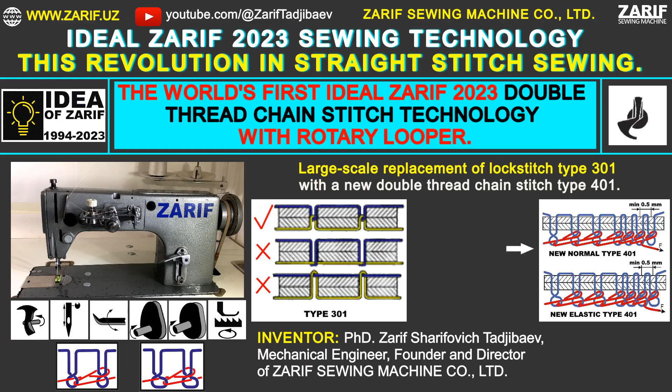Fundraising campaign to bring to market the Ideal Zarif 2023 year sewing technology, a revolution in straight stitch sewing. In 1994, we revolutionized sewing technology with the creation of the Zarif double thread chain stitch technology using a rotary looper. This breakthrough was officially recognized in 2000 with US patent number 6095069. It has taken us almost 26 years to perfect this innovative technology, making it the world's first ideal solution for sewing straight stitches. To achieve this, we first developed a prototype Zarif sewing machine based on our new technology in 1997.

We modified an industrial lockstitch sewing machine, Class 1022, Orsha, Belarus, to carry out our initial trials. Through extensive testing, we identified areas for improvement and gradually improved the machine by applying our expertise. Finally, in 2023, we successfully created the world's first Ideal Zarif technology for straight stitch sewing.

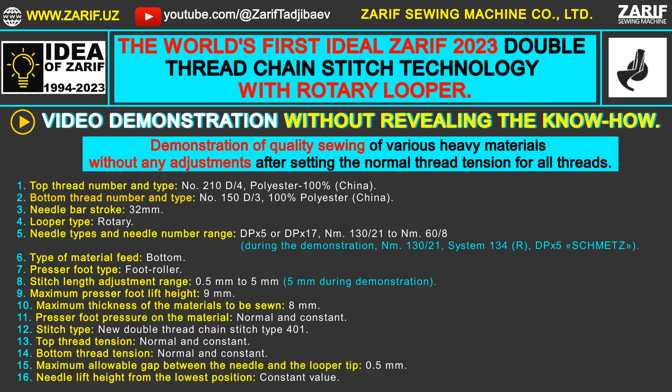Video demonstration without revealing the know-how. Demonstration of quality sewing of various heavy materials, without any adjustments after setting the normal thread tension for all threads. Our prototype of the innovative Zarif double thread chain stitch sewing machine works on the basis of our Ideal Zarif 2023 year double thread chain stitch technology with a rotary looper.

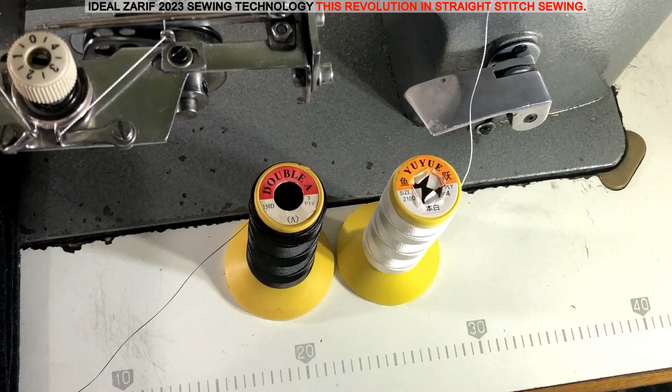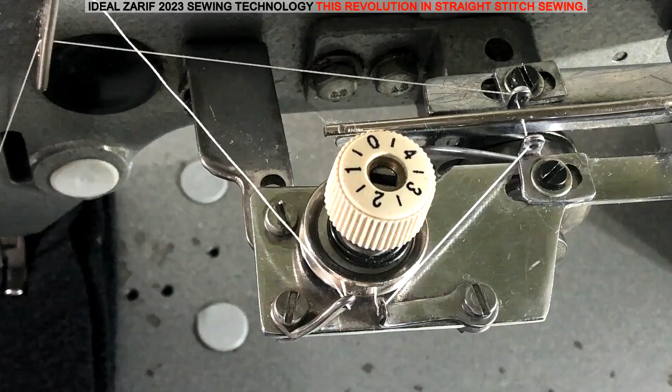For the sewing demonstration, we will be using sewing threads made in China. The main requirement is the absence of knots, as knots disrupt the stitch formation process as they cannot pass through the eye of the needle. During sewing, the top thread tensioner nut and the bottom thread tensioner nut, not shown, remain in a fixed position, ensuring the normal thread tension, neither too loose nor too tight.

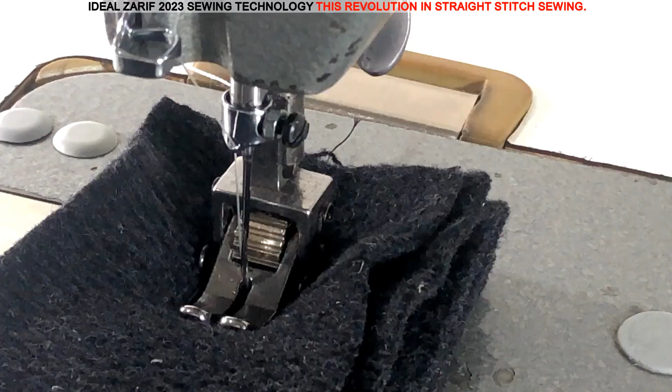In our Ideal Zarif 2023 year double thread chain stitch technology, the needle is not involved in pre-tightening the top thread loop from the previous stitch. As a result, for the first time ever, a double thread chain stitch sewing machine uses a needle with one long groove. This design offers greater resistance to bending compared to the double groove needle used in existing double thread and multi-thread chain stitch technologies.

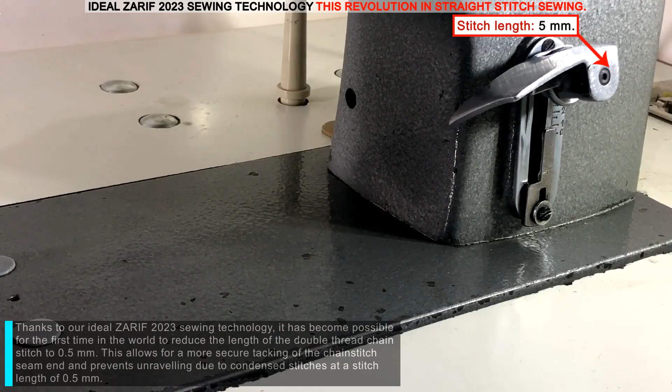Thanks to our Ideal Zarif 2023 year sewing technology, it has become possible for the first time in the world to reduce the length of the double thread chain stitch to 0.5 mm. This allows for a more secure tacking of the chain stitch seam end and prevents unraveling due to condensed stitches at a stitch length of 0.5 mm.

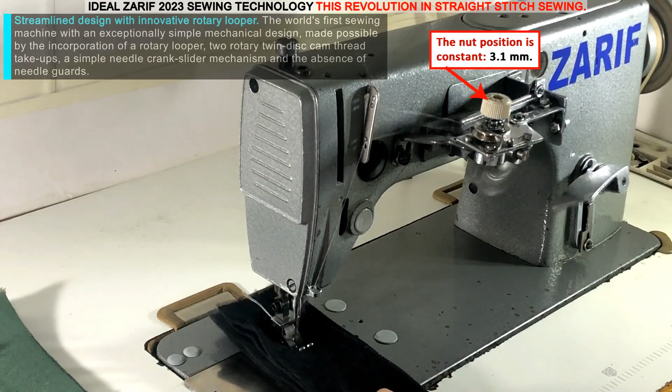Streamlined design with innovative rotary looper. The world's first sewing machine with an exceptionally simple mechanical design, made possible by the incorporation of a rotary looper, 2 rotary twin-disc cam thread take-ups, a simple needle crank slider mechanism and the absence of needle guards.

Revolutionary chain stitch look. This pioneering double-thread chain stitch sewing machine produces a new double-thread chain stitch type 401, in which the loops of the top and bottom threads are rotated 180 degrees. This innovative design makes the underside of the chain stitch look like a thick thread running along the seam, rather than a chain of threads, due to the use of a rotary looper.

Advanced capabilities for sewing thick materials. This groundbreaking sewing machine can sew materials up to 8 mm thick with a short needle bar stroke of 32 mm, thanks to our know-how.

Reliable stitching without needle guards. The world's first sewing machine that provides high reliability of stitch formation without needle guards, streamlining the machine's design and extending the life of the needle, thanks to our know-how.

Easily sew combinations of different materials. The world's first double-thread chain stitch sewing machine that can sew combinations of different materials such as textile leather, textile plastic, and textile plastic zippers without changing the normal tension of the threads, thanks to our know-how.

Secure tacking of the chain stitch seam end. The world's first double-thread chain stitch sewing machine, thanks to our know-how, makes it possible to reduce the length of the chain stitch to 0.5 mm, thus making the end of the chain stitch seam more secure against unraveling by condensing the stitches with a stitch length of 0.5 mm.

Our innovative prototype Zarif sewing machine has made it possible for the first time to sew materials up to 8 mm thick with a short needle bar stroke of 32 mm, thanks to the use of our know-how, making the machine universal for a wide range of materials. The thickness of various cross-linked materials consisting of two or more layers in a compressed state.

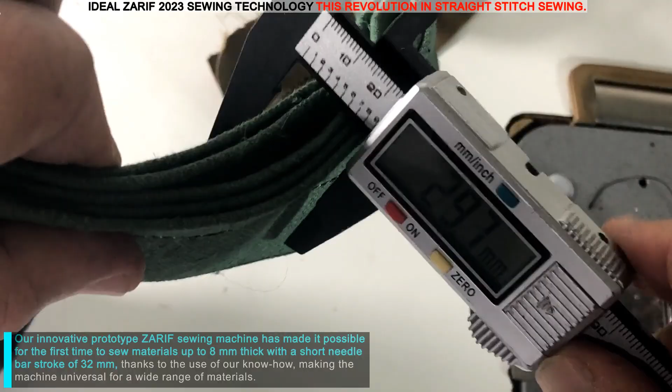Our innovative prototype Zarif sewing machine has made it possible for the first time to sew materials up to 8 mm thick with a short needle bar stroke of 32 mm, thanks to the use of our know-how, making the machine universal for a wide range of materials. The thickness of various cross-linked materials consisting of two or more layers in a compressed state. Our innovative prototype Zarif sewing machine has made it possible for the first time to sew materials up to 8 mm thick with a short needle bar stroke of 32 mm, thanks to the use of our know-how, making the machine universal for a wide range of materials. The thickness of various cross-linked materials consisting of 2 or more layers in a compressed state.

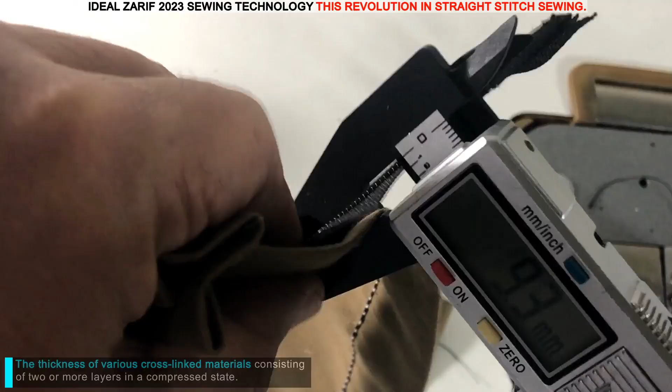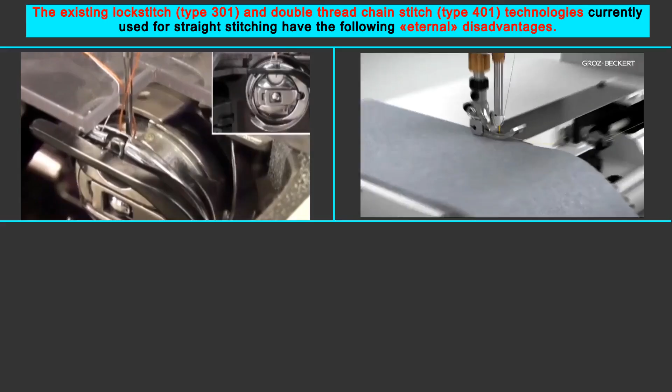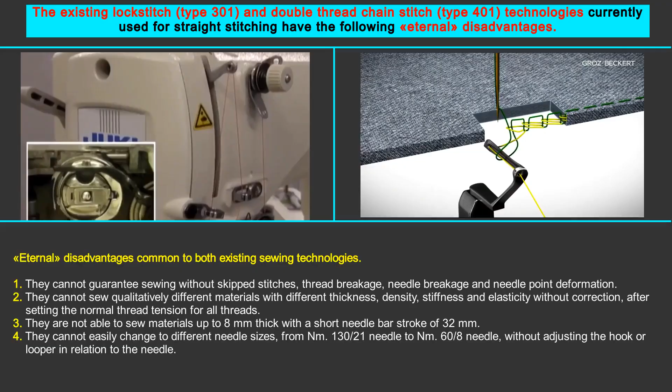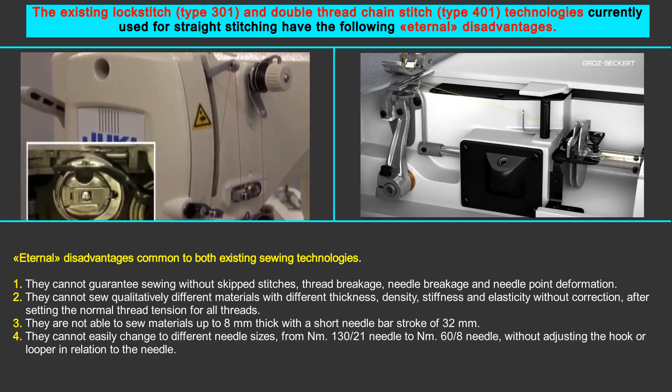The existing lockstitch, Type 301, and double thread chain stitch, Type 401, technologies currently used for straight stitching have the following eternal disadvantages. Eternal disadvantages common to both existing sewing technologies. They cannot guarantee sewing without skipped stitches, thread breakage, needle breakage, and needle point deformation. They cannot sew qualitatively different materials with different thickness, density, stiffness, and elasticity without correction, after setting the normal thread tension for all threads.

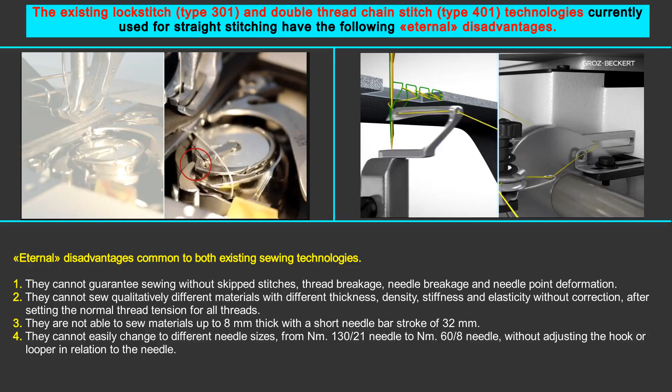They are not able to sew materials up to 8 mm thick with a short needle bar stroke of 32 mm. They cannot easily change to different needle sizes, from number 130 needle to number 60 needle, without adjusting the hook or looper in relation to the needle.

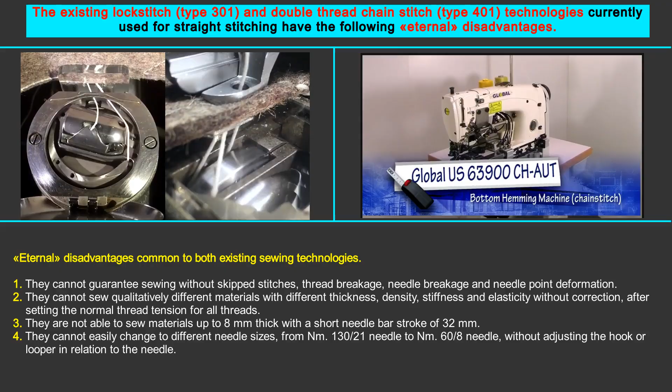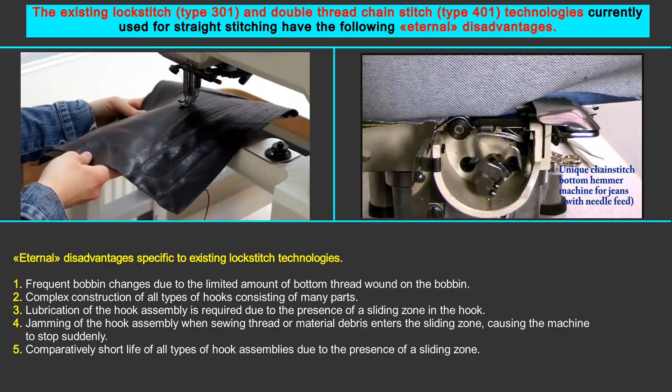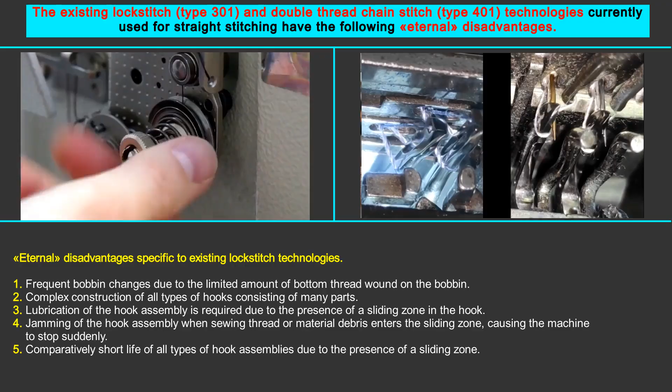Eternal disadvantages specific to existing lockstitch technologies. Frequent bobbin changes due to the limited amount of bottom thread wound on the bobbin. Complex construction of all types of hooks consisting of many parts. Lubrication of the hook assembly is required due to the presence of a sliding zone in the hook. Jamming of the hook assembly when sewing thread or material debris enters the sliding zone, causing the machine to stop suddenly. Comparatively short life of all types of hook assemblies due to the presence of a sliding zone.

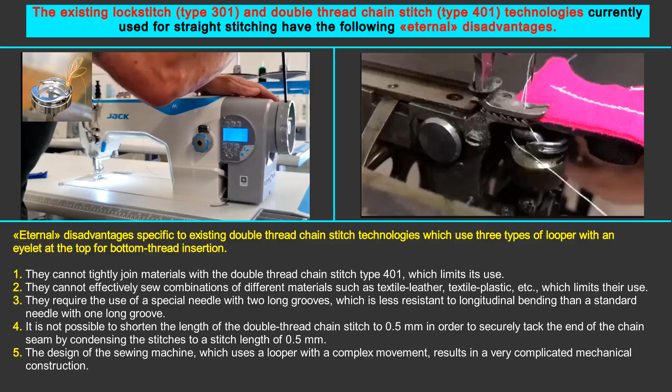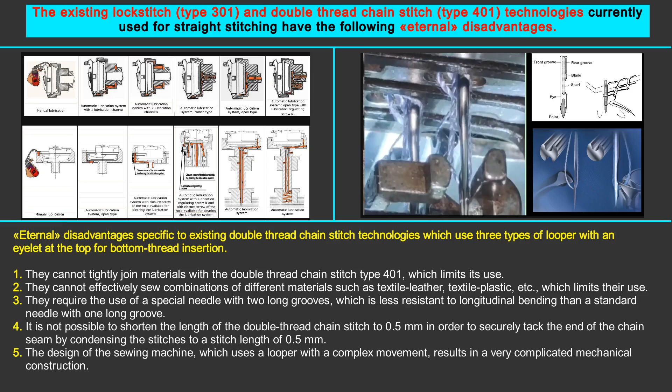Eternal disadvantages specific to existing double thread chain stitch technologies which use 3 types of looper with an eyelet at the top for bottom thread insertion. They cannot tightly join materials with the double thread chain stitch type 401, which limits its use. They cannot effectively sew combinations of different materials such as textile leather, textile plastic, etc., which limits their use. They require the use of a special needle with 2 long grooves, which is less resistant to longitudinal bending than a standard needle with 1 long groove.

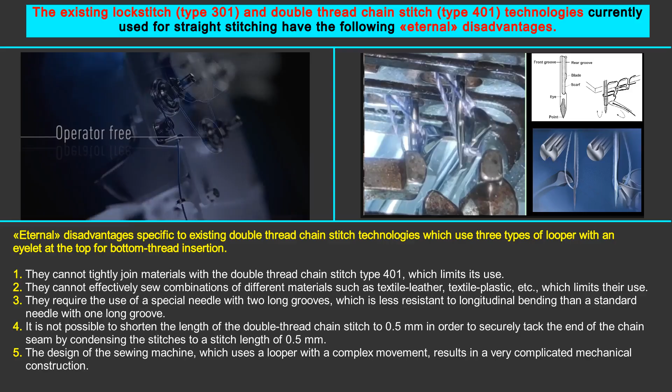It is not possible to shorten the length of the double thread chain stitch to 0.5 mm in order to securely tack the end of the chain seam by condensing the stitches to a stitch length of 0.5 mm. The design of the sewing machine, which uses a looper with a complex movement, results in a very complicated mechanical construction.

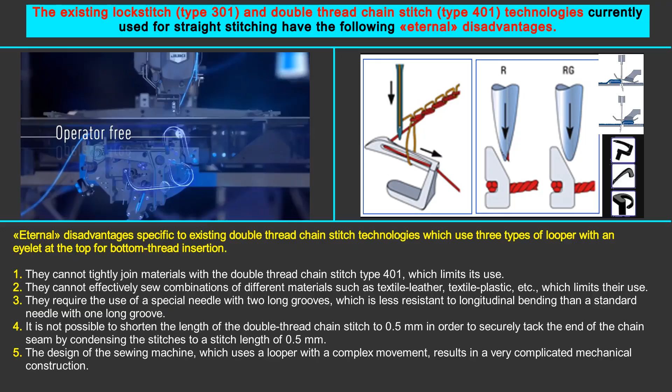Our ideal Zarif 2023 year double thread chain stitch technology has revolutionized sewing machine design and straight stitch sewing. For the first time, a rotary looper is used to form a double thread chain stitch, resulting in the world's first new double thread chain stitch type 401, where the top and bottom thread loops are rotated 180 degrees. For the first time, an ordinary needle with a single long groove is used to form a double thread chain stitch, as the needle does not participate in the pre-tightening of the top thread loop placed in the previous stitch.

For the first time, materials up to 8 mm thick can be sewn with a needle bar stroke of 32 mm. For the first time it is possible to sew materials of different thickness, density, stiffness and elasticity without any adjustments by setting the normal tension for all threads. For the first time it is possible to sew without skipped stitches, thread breakage, needle breakage and needle point deformation, provided the thread is free of knots and the needle size matches the material being sewn.

For the first time, using our know-how, it is possible to tightly pull the top thread loop in a stitch to achieve a dense material join, or to loosely pull the top thread loop in a stitch to get smooth seams on light materials and elastic seams in stretchable materials without adjusting normal thread tension.

For the first time, the maximum allowable gap between the needle and the tip of the looper has been increased to 0.5 mm, allowing an easy transition from a number 130 needle to a number 60 needle without adjusting the looper relative to the needle. For the first time, high stitch formation reliability has been achieved without the use of needle guards.

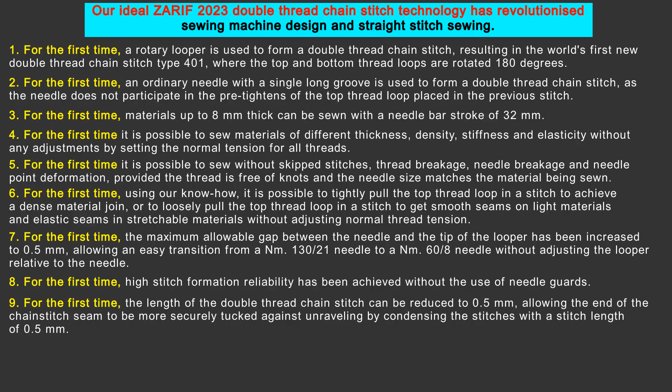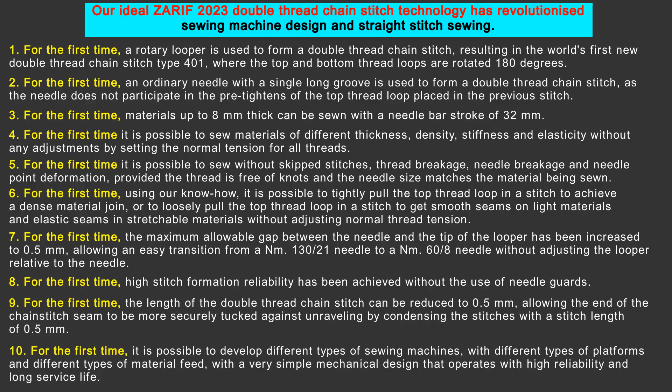For the first time, the length of the double thread chain stitch can be reduced to 0.5 mm, allowing the end of the chain stitch seam to be more securely tucked against unraveling by condensing the stitches with a stitch length of 0.5 mm. For the first time, it is possible to develop different types of sewing machines, with different types of platforms and different types of material feed, with a very simple mechanical design that operates with high reliability and long service life.

History of Zarif double thread chain stitch technology with rotary looper. In 1994 we came up with the idea of creating a double thread chain stitch type 401 using a rotary looper. We applied for a patent for this new Zarif double thread chain stitch technology and in 2000 US patent number 6095069 was granted.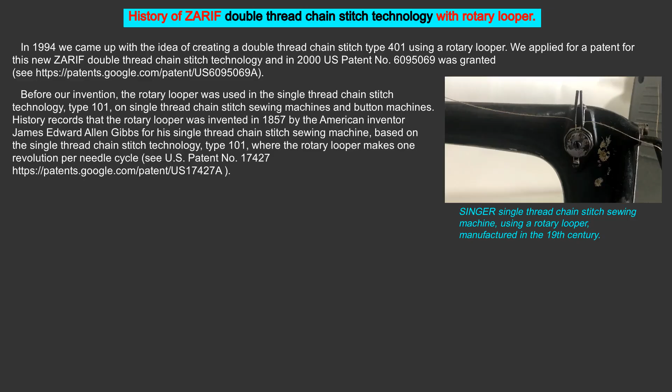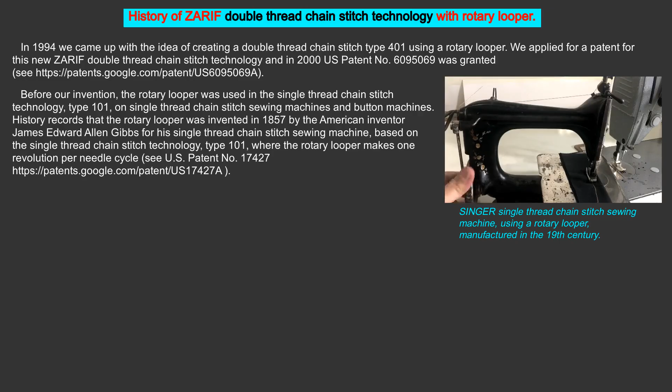Before our invention, the rotary looper was used in the single thread chain stitch technology, Type 101, on single thread chain stitch sewing machines and button machines. History records that the rotary looper was invented in 1857 by the American inventor James Edward Allen Gibbs for his single thread chain stitch sewing machine, based on the single thread chain stitch technology, type 101, where the rotary looper makes 1 revolution per needle cycle. See US patent number 17427.

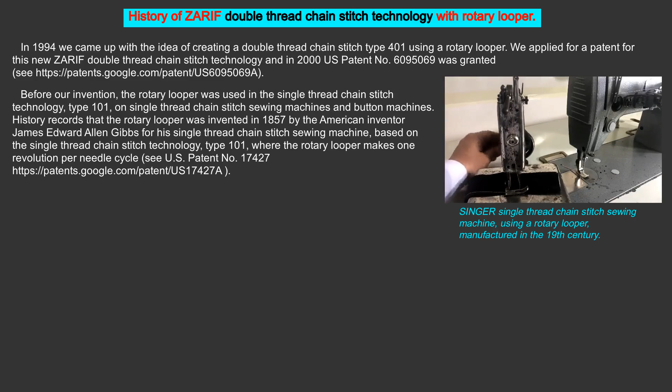A rotary looper is a unique and the only tool in sewing technology that can rotate loops of thread around its body by turning them 180 degrees with its tail. As is known, the rotary looper is made in one piece and has 3 zones: the head zone with a front tip to catch the thread and a rear tip to release the thread loop from the body of the looper, the tail zone for rotating the thread loop through 180 degrees, and the shaft zone for attaching the looper to the machine.

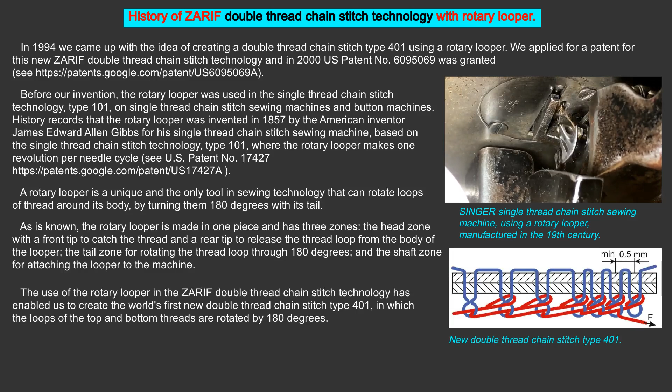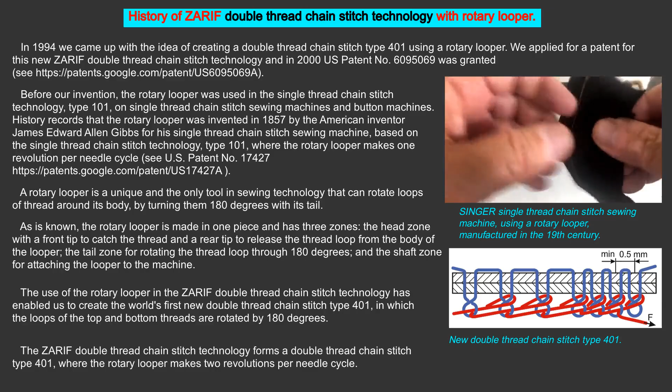The use of the rotary looper in the Zarif double thread chain stitch technology has enabled us to create the world's first new double thread chain stitch type 401, in which the loops of the top and bottom threads are rotated by 180 degrees. The Zarif double thread chain stitch technology forms a double thread chain stitch type 401, where the rotary looper makes 2 revolutions per needle cycle. Zarif double thread chain stitch technology with rotary looper, invented by us in 1994, see US patent number 6095069.

In the Zarif double thread chain stitch technology, the top thread is fed to the looper by a needle with a vertical reciprocating motion, as is usually done. To feed the bottom thread to the looper, a bottom thread pusher is used, which makes oscillating movements in the horizontal plane. Since the rotary looper can loop thread around its body in the form of a loop, once the bottom thread, fed by the bottom thread pusher, is caught by the front tip of the looper, the top thread loop leaves the looper body and, as it tightens, forms a loop from the bottom thread which the looper can now wrap around its body.

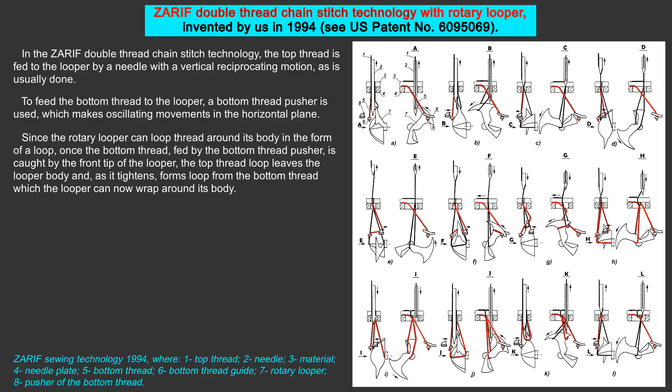As the rotary looper only uses a small length of the thread loops and the thread loops are released from the rear tip of the looper, the thread loops can be tightened very smoothly. Therefore, the Zarif double thread chain stitch technology uses 2 rotary twin disc cam thread take-ups to feed and tighten both the top and bottom threads, with each thread being controlled separately.

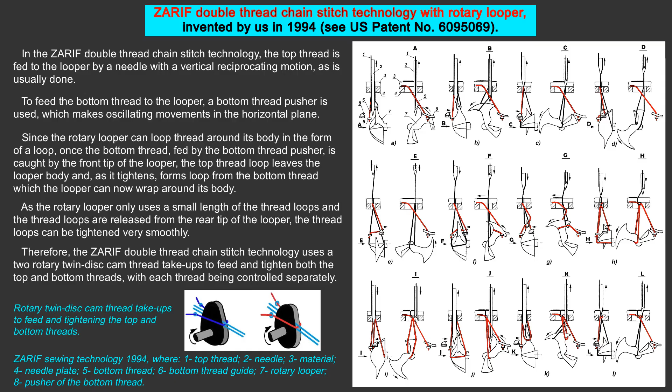History of the prototype development of the Zarif sewing machine based on Zarif double thread chain stitch technology with a rotary looper. In 1997, we decided to build a prototype sewing machine to test our new Zarif double thread chain stitch technology with a rotary looper, which we had invented in 1994. We chose a Class 1022 lockstitch industrial sewing machine from the Belarusian company Orsha because it was widely used in Uzbekistan at the time and was relatively affordable. The machine had a needle bar stroke of 32 mm and was designed to sew fabrics of medium thickness.

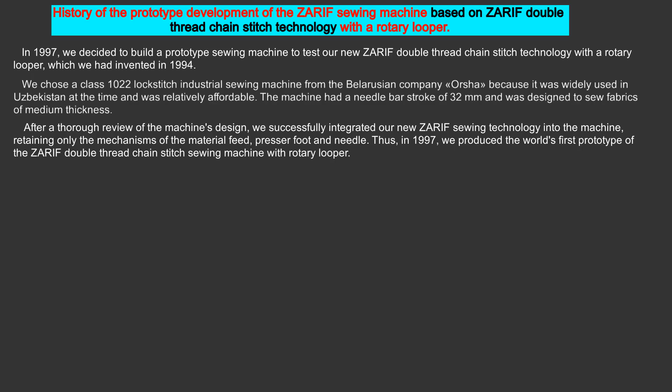After a thorough review of the machine's design, we successfully integrated our new Zarif sewing technology into the machine, retaining only the mechanisms of the material feed, presser foot, and needle. Thus, in 1997, we produced the world's first prototype of the Zarif double thread chain stitch sewing machine with rotary looper. Trials on a prototype Zarif sewing machine allowed us to identify some of the shortcomings of our new Zarif double thread chain stitch technology developed in 1994.

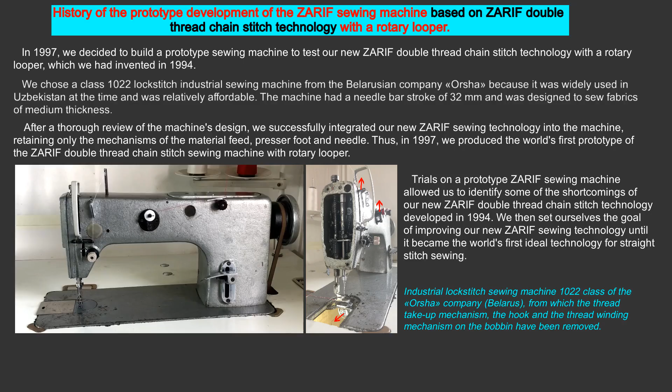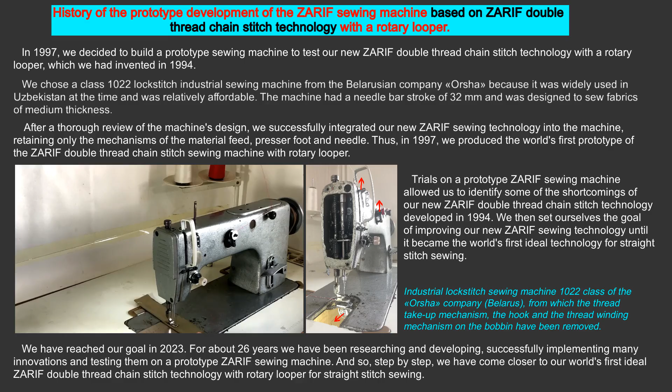We then set ourselves the goal of improving our new Zarif sewing technology until it became the world's first ideal technology for straight stitch sewing. We reached our goal in 2023. For about 26 years we have been researching and developing, successfully implementing many innovations and testing them on a prototype Zarif sewing machine. And so, step by step, we have come closer to our world's first ideal Zarif double thread chain stitch technology with rotary looper for straight stitch sewing.

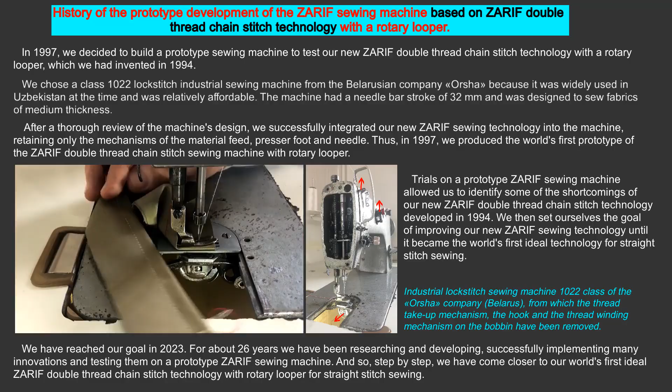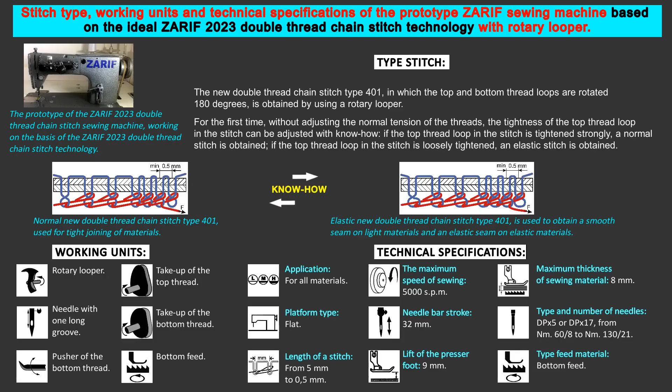Stitch type, working units, and technical specifications of the prototype Zarif sewing machine based on the ideal Zarif 2023 year double thread chain stitch technology with rotary looper. The world's first prototype of the Zarif 2023 year double thread chain stitch sewing machine has an extremely simple mechanical design and forms stitches with high reliability and durability.

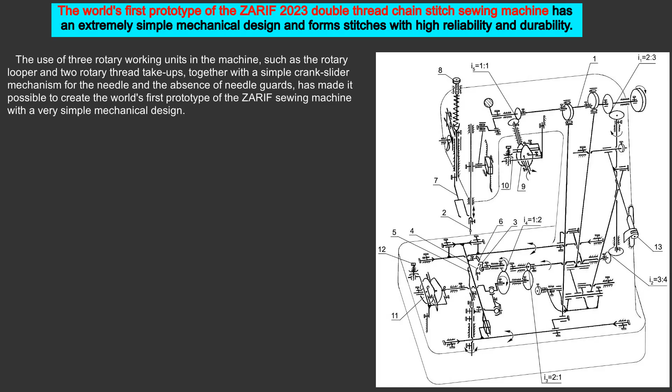The use of 3 rotary working units in the machine, such as the rotary looper and 2 rotary thread take-ups, together with a simple crank slider mechanism for the needle and the absence of needle guards, has made it possible to create the world's first prototype of the Zarif sewing machine with a very simple mechanical design.

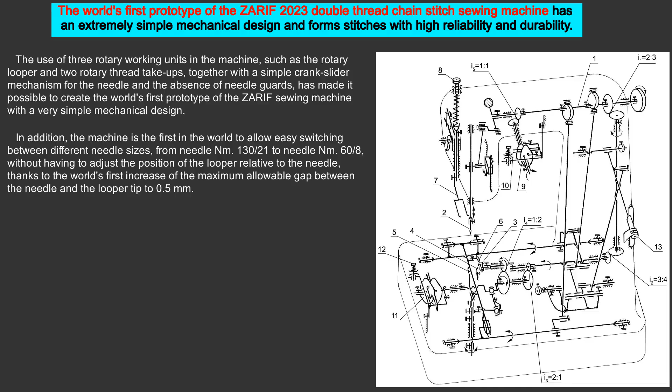In addition, the machine is the first in the world to allow easy switching between different needle sizes, from needle number 130 to needle number 60, without having to adjust the position of the looper relative to the needle, thanks to the world's first increase of the maximum allowable gap between the needle and the looper tip to 0.5 mm.

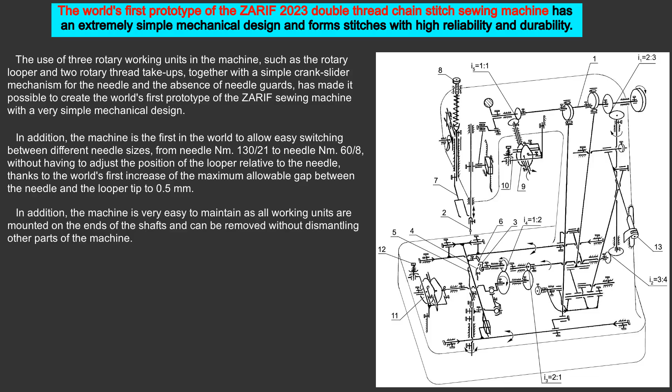In addition, the machine is very easy to maintain as all working units are mounted on the ends of the shafts and can be removed without dismantling other parts of the machine. Kinematic diagram of the prototype Zarif 2023 year double thread chain stitch sewing machine.

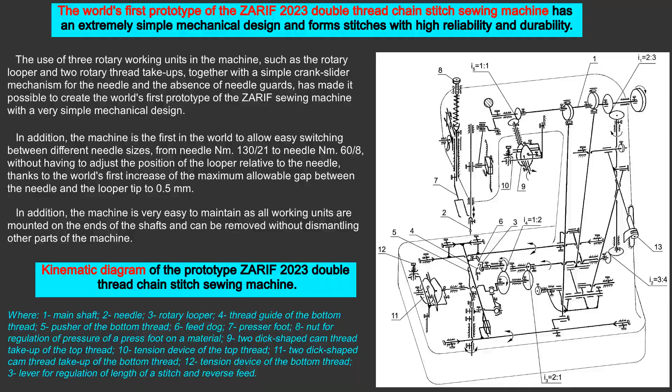Our automatic thread trimming technology for the Zarif double thread chain stitch technology with rotary looper. It is well known that most modern industrial sewing machines are equipped with automatic thread trimming, and all automated sewing systems require automatic thread trimming. With this in mind, we have long been researching and developing automatic thread trimming technology for our Zarif double thread chain stitch technology with rotary looper.

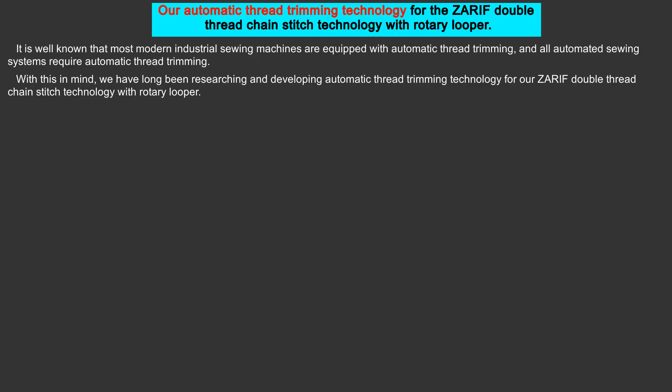Thanks to these efforts, we successfully invented the automatic thread trimming technology for our Zarif double thread chain stitch technology with rotary looper in 2020, and further improved it in 2021 and 2023. The advanced version, which we invented in 2023, has not yet been physically manufactured to ensure its practical functionality. However, the drawings of our automatic thread trimming technology prove that it works in theory.

At present, we cannot disclose the details of our automatic thread trimming technology as it is not yet patented. However, we can say that the top and bottom threads are trimmed under the needle plate, with the bottom thread end remaining clamped under the needle plate after trimming. This eliminates the need to rethread the bottom thread when moving to the next sewing operation.

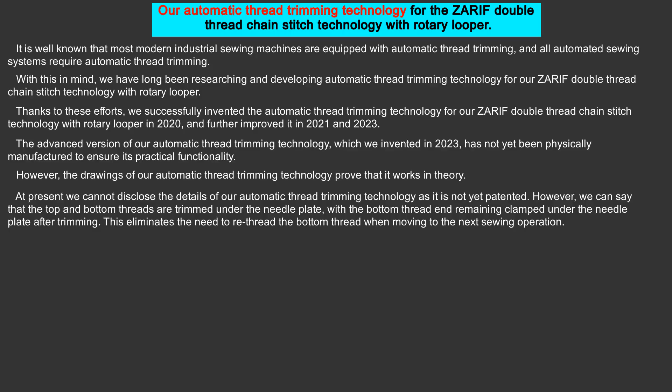If the sewing process is finished with condensed stitches of 0.5 mm stitch length and manual thread trimming, the resulting chain stitch seam will be difficult to unravel from the end of the seam. If the sewing process is finished with condensation stitches at a stitch length of 0.5 mm and with automatic thread trimming, the resulting chain stitch seam cannot be unraveled from the end of the seam, as the end of the top thread passes through the last loop of the bottom thread.

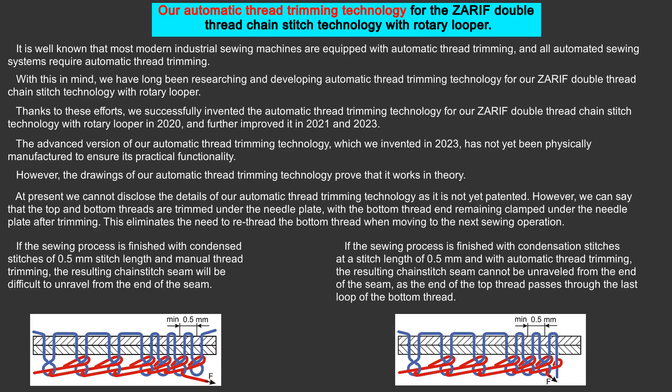Our ideal Zarif 2023 year double thread chain stitch technology with rotary looper opens a new era in the development of automated straight stitch sewing. It is well known that the future of mass production in various sewing industries is closely linked to automation, and the automation of sewing processes plays an important role in this transformation. Currently, some sewing operations are already being automated using robotic manipulator-controlled sewing systems. In the future, these robotic manipulators may be replaced by more advanced humanoid robots.

When it comes to automated sewing, it is essential that the process is performed to a high standard, ensuring that there are no skipped stitches, thread breakage, needle breakage and deformation of the needle point. Efficient sewing of different materials without the need for adjustments is also critical to the automation of the sewing process. Our ideal Zarif 2023 year double thread chain stitch technology with rotary looper for straight stitch sewing is the perfect solution to meet all these requirements.

Our prototype Zarif sewing machine has proven this in practice, but only when the material is fed in one direction. This allows us to create different automatic sewing systems based on this technology, where the material is fed in a single direction. However, there are many sewing operations where the stitch must follow a complex path. In such cases, stitch formation must be independent of the material feed direction.

With this in mind, we have been working for a long time to develop a device that would allow our Zarif double thread chain stitch technology with rotary looper to produce stitches regardless of the direction of material feed. As a result of our efforts, we were able to invent this device in 2020, improve it in 2021 and complete the final refinements in 2023. Although we have not yet built and tested the device, our drawings show that it theoretically works.

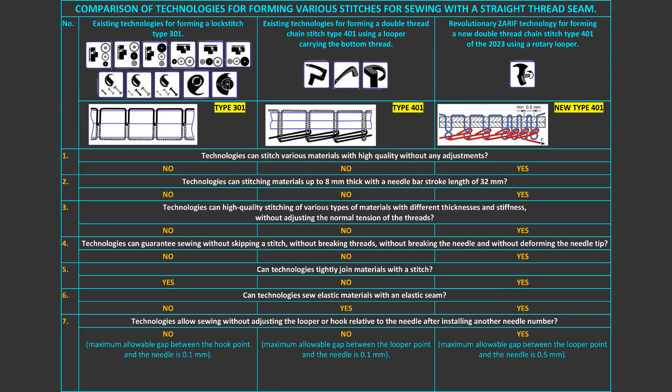Advantages and disadvantages of lockstitch type 301 and double thread chain stitch type 401. Comparison of technologies for forming various stitches for sewing with a straight seam.

Application of the revolutionary ideal Zarif 2023 year double thread chain stitch technology with a rotary looper that forms stitches in only one direction. Our prototype Zarif sewing machine, based on the ideal Zarif 2023 year double thread chain stitch technology with rotary looper, has proven its ability to perform straight stitching with material feed in only one direction and a stitch length ranging from 0.5 mm to 5 mm. In addition, we have developed a technical solution that allows the stitch length to be increased to 10 mm.

Based on our ideal Zarif 2023 year double thread chain stitch technology, which forms stitches in only one direction, the following machines can be designed and manufactured. Various industrial sewing machines with different types of platforms and material feed mechanisms. Various automated sewing systems with material feed in one direction only. A range of programmable automatic pattern sewing machines with a 360 degrees rotating head that can feed material in any direction to create complex stitch patterns.

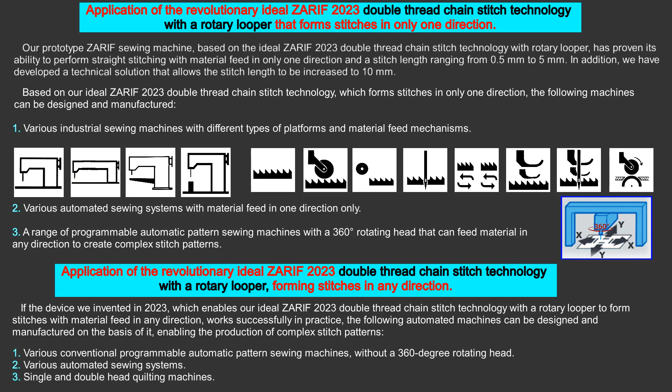Application of the revolutionary ideal Zarif 2023 year double thread chain stitch technology with a rotary looper, forming stitches in any direction. If the device we invented in 2023, which enables our ideal Zarif 2023 year double thread chain stitch technology with a rotary looper to form stitches with material feed in any direction, works successfully in practice, the following automated machines can be designed and manufactured on the basis of it, enabling the production of complex stitch patterns. Various conventional programmable automatic pattern sewing machines, without a 360-degree rotating head. Various automated sewing systems. Single and double head quilting machines.

Can our revolutionary ideal Zarif 2023-year double-thread chain stitch technology with a rotary looper become obsolete in the future? We are confident that this will not happen. Our confidence is based on the following undeniable facts. The eternal disadvantages of the existing sewing technologies currently used for straight stitch sewing, such as the lockstitch type 301 and the double thread chain stitch type 401, prevent them from becoming the ideal solution for straight stitch sewing, no matter how much they evolve in the future.

Furthermore, the invention of an ideal straight stitch sewing technology can only be achieved by creating a new double thread chain stitch technology that eliminates the eternal disadvantages of existing sewing technologies, since it is technically impossible to invent an ideal straight stitch sewing technology by developing a new lockstitch technology without using a hook. However, the task of inventing a new double thread chain stitch technology and making it the ideal solution for straight stitch sewing is a very challenging one.

All previous attempts to invent a new double thread chain stitch technology and make it the ideal solution for straight stitch sewing were unsuccessful. For example, the new double thread chain stitch technology using a special hook, see US patent number 3811392, 1974, was never commercialized. We believe that any new double thread chain stitch technology using a special hook cannot become an ideal solution for sewing due to the complexity of the special hook design and the need for lubrication.

We were the first in the world to invent the new Zarif double thread chain stitch technology with rotary looper in 1994, which was granted US patent number 6095069 in 2000. It took us about 26 years to make this new Zarif sewing technology the world's first ideal straight stitch sewing technology.